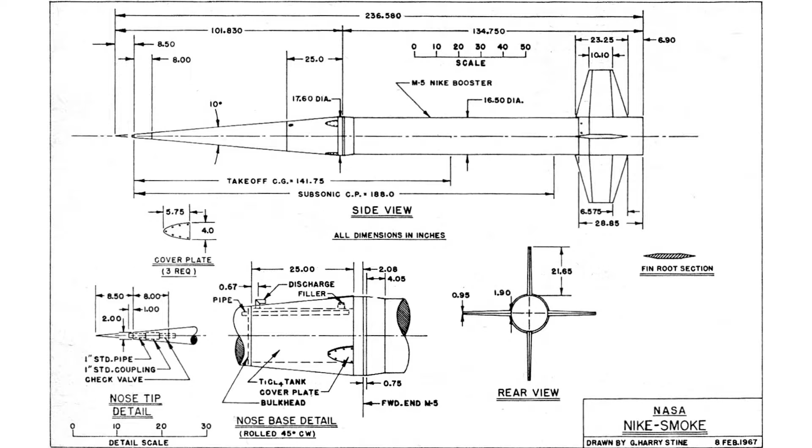Now for this project, all the dimensions are going to be based on this diagram created by G. Harry Stine, founder of the National Association of Rocketry and former president. Also the author of the Handbook of Model Rocketry, which is where I first came across this particular drawing. It is available online in a variety of places. Just Google Nike Smoke dimensions and you'll be able to find it. I'm not linking to it here because I don't have permission from the copyright owners, but it is widely available on the net.

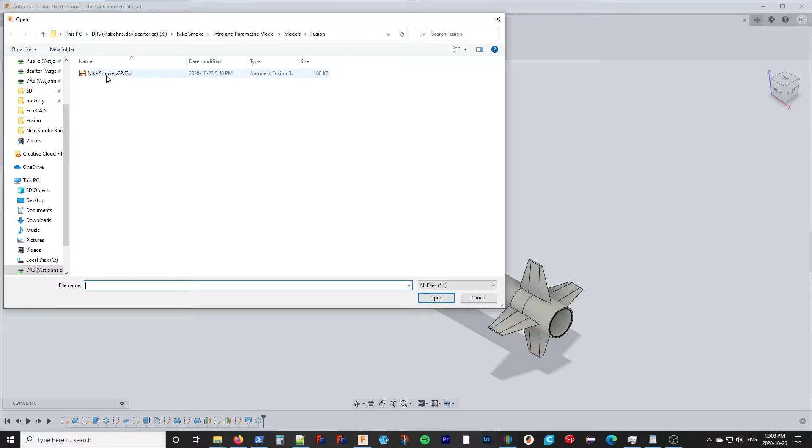Okay, so if you're going to create this model yourself, you're going to start by importing the model. In Fusion 360, you would go to the File menu, select Upload, select the file you're going to upload. In this case, it's the Nike Smoke Fusion 360 diagram. Select the location where you're going to place it, and then upload. Since I've already got it here, I'm not going to hit the upload button. I'm going to work with the version I have. Okay.

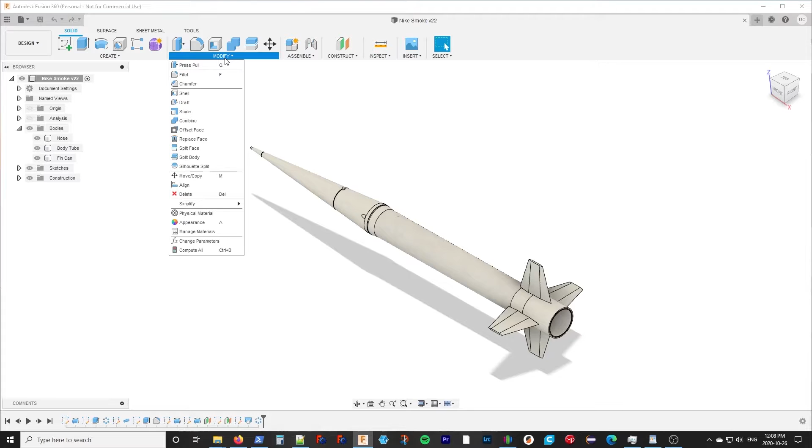So let's look at what we need to do. Again, as I've mentioned, we're going to be basing all of our dimensions off of the dimensions of the body tube. So we need to be able to set that. We have a number of configuration parameters, and they're all available if you go into the Modify menu and then select Change Parameters. It'll show you the parameters we have.

Okay, so I'm going to close the favorites here, and you can see we have all kinds of user-defined parameters. Now, unfortunately, Fusion 360 doesn't allow me to put these in an order that makes sense. So what I've done is in the favorites, I've put all the ones that you might want to modify, and any others are going to go below. They're basically added in whatever order you create them. So that's the reason for this particular order. It may look kind of random, and to some degree it is.

But the two key parameters we're going to look at are the inner and the outer. Now, I've looked up these dimensions for the 29mm body tube from the Apogee Components website. And I've specified this in inches because the rocket that we're doing the model of is an American rocket, and the drawing is in inches. That's a fact of life when doing scale modeling, so unfortunately those of us used to millimeters have to deal with that.

But Apogee is pretty accommodating. Being an American site, they do give their dimensions in inches. Now the scale itself is based on the outer diameter. Okay. Now I have some other parameters below, and I'm just going to duck down here to look at it.

One of which is, this is a fixed parameter, the Nike diameter. So this is the diameter of the actual rocket according to the diagram. So it's 16.5 inches. We can then calculate the scale. So it's the Nike diameter, 16.5 inches, divided by our outer diameter, 1.176 inches. And the times 1 inch just means that we want to specify this measurement in inches, the default being millimeters internally.

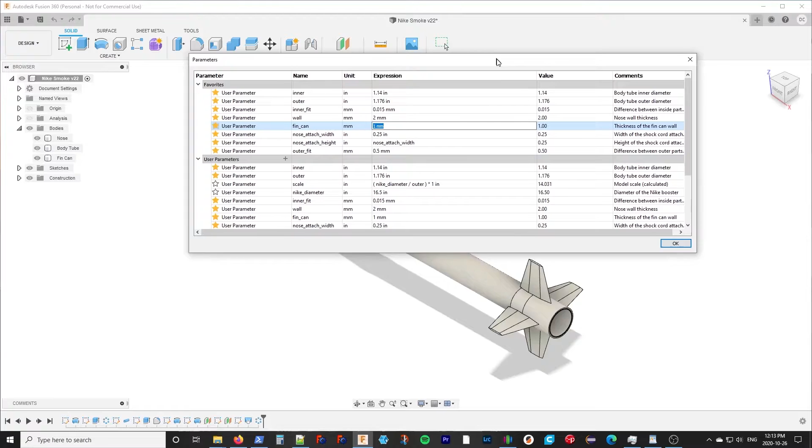So that's the outer fit. This one is reasonably big. It's 0.5 millimeters, which means it's 1 millimeter in diameter. And it doesn't sound like a lot, but it really does make a difference for sliding that fin can over the body tube. The other one, the inner fit, the only place that that's actually affecting is the nose cone.

So let's highlight that, the nose. Yeah, it's not going to highlight it. But basically there is, well, let's get rid of the body tube here. Yeah, so there is a portion that goes inside the body tube, and that's what holds the nose cone in place. You want that to be a reasonably tight fit because as the rocket is flying, that's what's holding the two pieces together. It is not glued in place, so you want that snug.

And in this case, I've specified a very small fit parameter to this, and you might even want to go a bit lower. You can adjust that after the fact a little bit with some masking tape or whatever to shim it into the correct dimension. But if you make it a little bit oversized, too big for your body tube, you can also sand it down a little. So this can even be as close to 0 as you want to make it.

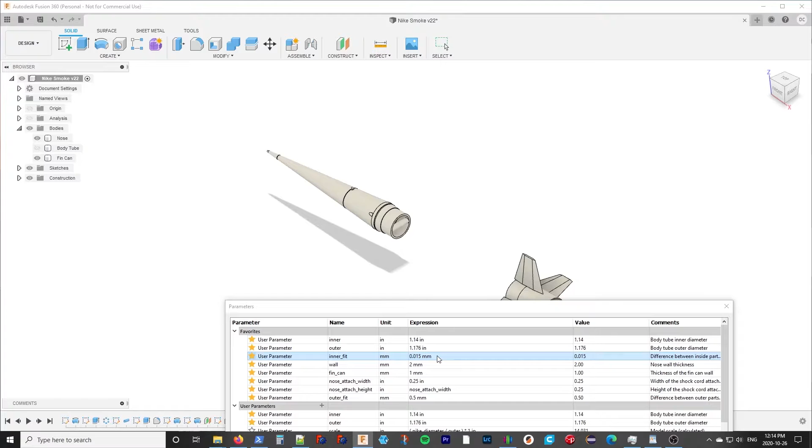The other two parameters are the nose attach width and height, and that describes this post going across at the base of the nose cone. Now, depending on your project, you may want to attach to the nose cone slightly differently, but this is a good generic method I've found for lightweight nose cones. It just puts a post in place and you can tie the shock cord and parachute around that.

But again, this is your model. You have access to the original, so create a copy and modify it as you choose. In my case, I've gone with 1/4 inch and I made that the same for both, so that gives me a round post to attach things to. But you can adjust them separately.

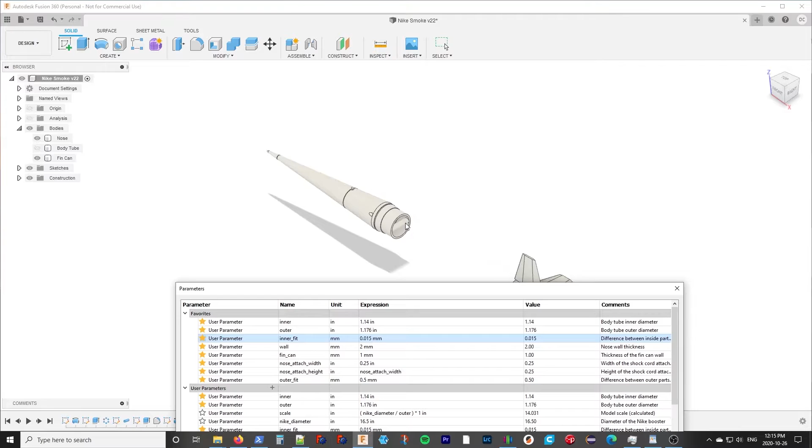Now looking at some of the calculated parameters, we've already seen some of them, for example, the scale and the body length. But there are some others that are interesting as well, and it depends to a large degree on how you're building your model whether or not these are required. So we have the leading edge and the trailing edge of the fin from the base of the rocket.

The main reason you'd want to use this is if you're not using the fin can as a 3D printed model. So for example, you're making your fins out of balsa or out of birch for a high power rocket and want to do through the wall fins. This will give you the location of the leading and trailing edges from the base of the rocket so that you can cut your slots or just glue the fins into the correct position.

The last one I advise you to use with caution. This is the center of pressure as specified on the diagram. It shows on the diagram as a subsonic center of pressure. In this case, I've measured it from the base because it's close to the base. I would take this one with a grain of salt.

I would certainly want to do a simulation to make sure that this is correct, but it does give us a good idea, a second opinion on our simulations. So it'll help us validate our simulations. But again, don't rely on this one for your center of gravity and center of pressure calculations. Do your simulations, and that'll help you in other ways as well.

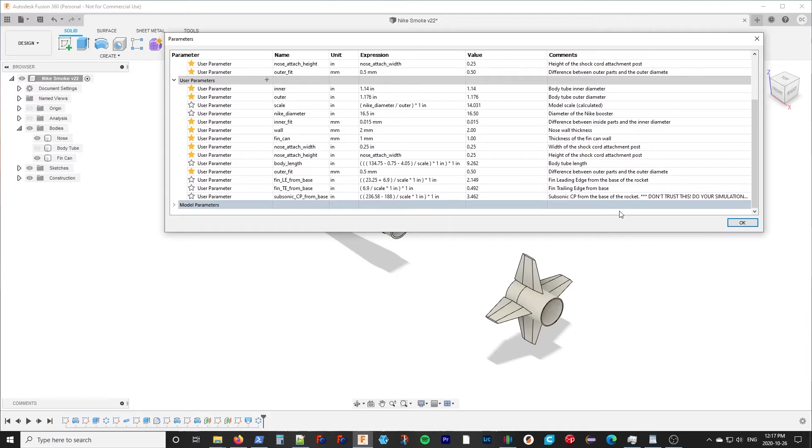Okay, so how does this work in the sketches? If I go down to just the basics of the nose cone without the details, you can see that the dimensions are constrained using these fx's, and that means we use a calculation. For this particular dimension, it's 25 inches in the diagram, divided by scale, and again times 1 inch to ensure that the dimension is in inches and not the default of millimeters used inside the product.

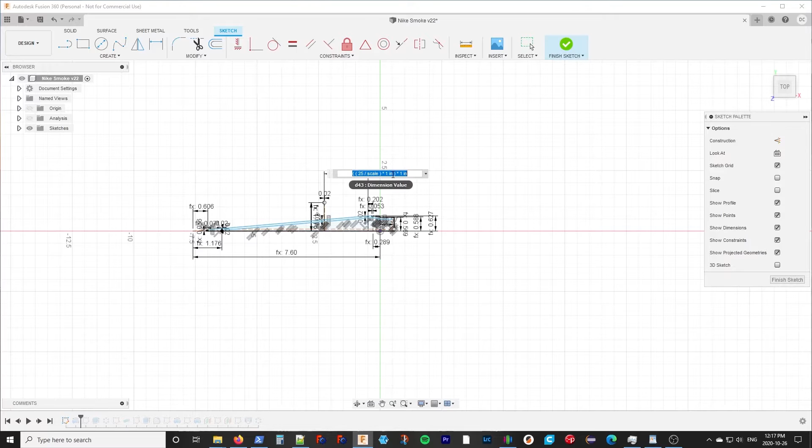It added a second one because it just does that. That's one of the quirks of Fusion. It doesn't hurt, it's not a big deal. Now, as we go ahead and modify this, let's go back to our change parameters again. Let's set our outer dimension to 2 inches. Okay, and you can see it adjusted everything. So instead of about 1.7, we're now up to a 3 inch for this dimension.

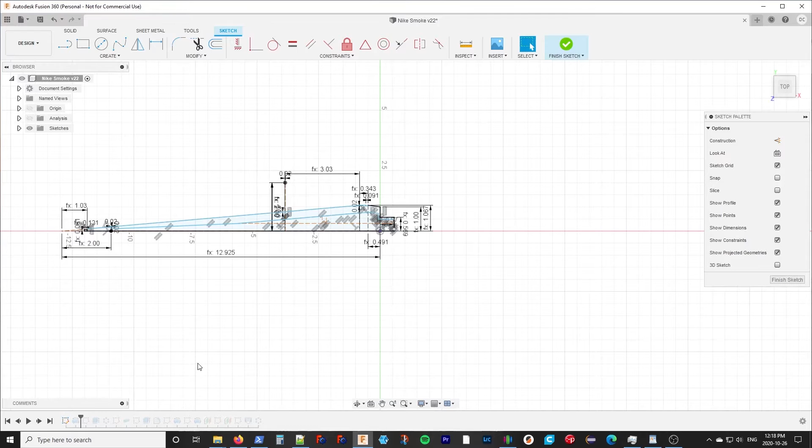So this is how the parametric modeling helps us adjust for the size of our rocket, and you can see that that is done through the whole rocket. Not all the dimensions need the scale. For example, that one does, bad example. Let's look at the outer dimension. Yeah, it's just the outer divided by 2 because it's the radius and not the diameter. Okay, so let's put it back to where it was and bring on the full rocket.

So how do we turn this into an actual flying model? Well, in terms of 3D printing, there's only 2 parts to print: the nose and the fin can.

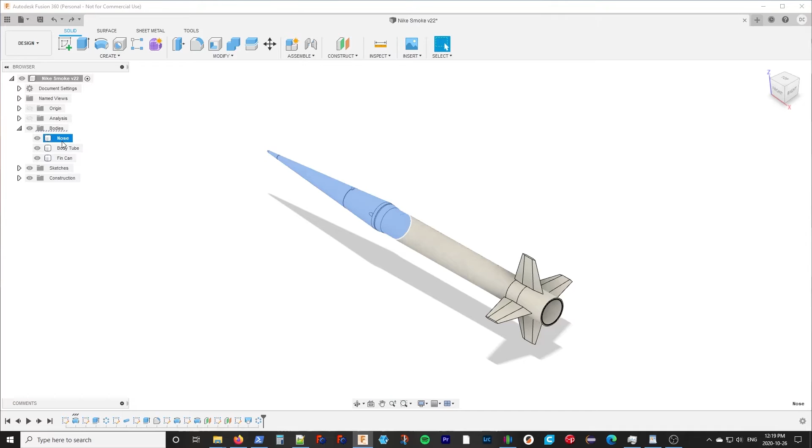So let's get rid of the body tube. So you would select the nose, right click, save as STL, bring it into your slicer and print it as you normally would. Now this is a pretty long object. In my case, I can print it vertically because my printer is big enough at this scale, but my old printer, for example, is not. So you may need to do it a little more horizontally.

If you're going to do that, you're going to want to print it in a very fine detail. Otherwise, you're going to get a lot of print artifacts along the length of the nose. The other option is to split this up into pieces. I don't do that for this particular project, but I'll show that in later videos how we can do that as well. It's something I've done with my Saturn V and with my Saturn 1B.

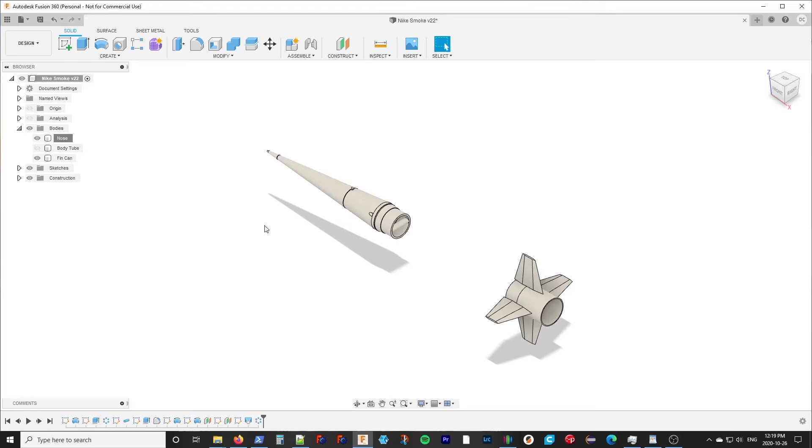Okay, so we printed out the 2 pieces in 3D printing. Cut our body tube to length. We glue the fin can onto the body tube. In my case, I just use basic CA glue for that. There are some pieces we need to add. We need to add a motor mount. The motor size depends on your project. For this particular one, I've chosen an 18mm motor mount. It's a nice, inexpensive motor to fly, so A's, B's, and C's. And that had just the regular retaining hook and the normal pieces you would have to find in a motor mount.

The launch lugs is one area where you need to be careful. The diameter of the nose cone is actually larger than the diameter of the body tube. So you're going to need a standoff of some sort. So you do want to see what the outer diameter of your nose cone is versus the body tube. In my case, it was about 2 millimeters, so I created a 3 millimeter standoff with some scrap balsa that I have for another Nike Smoke that I'm building. So again, be aware of that.

For the shock cord and parachute, I used a standard length of Kevlar for the shock cord, a standard attachment method. Remember, when you're attaching this to the body tube, to leave clearance for the nose cone so you don't get stuck halfway. The parachute for this one, at this scale, I will be using a 15-inch. I don't have one currently, it's on order. I have some 18 inches, but that would allow the rocket to be carried a long, long ways, and I'm too old to be chasing rockets when I don't have to. So I'll be waiting for the 15-inch.